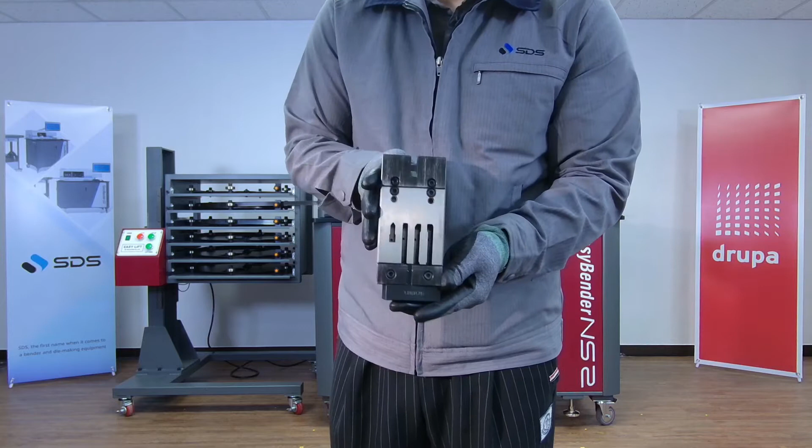And now I'm just gonna go back to the machine and show you some samples with the 23.3 millimeter rules, and then I will change over to 23.8 millimeter after changing the shims, and make some more samples with nicks, broachings, and perforations.

Now we have a setup for NS2 with Easy Lift here. This is the automatic rule stacker that we came up with maybe more than 10 years ago, and it's been one of our products for a long time. I think this is a perfect opportunity for me to introduce this one, and this is so easy to use.

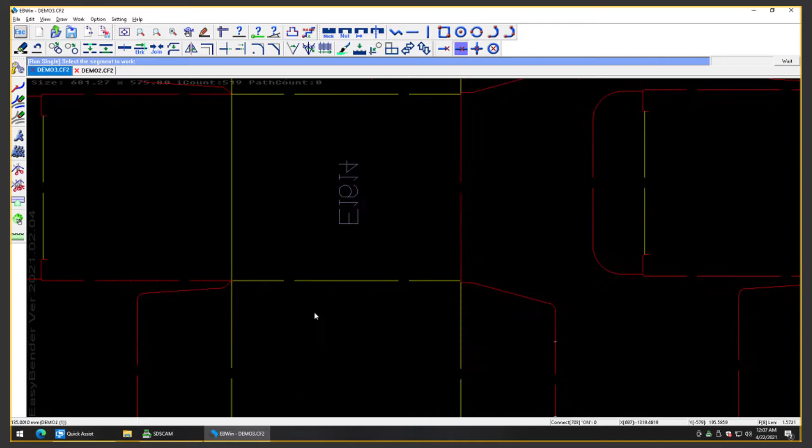And I'm just gonna change to the software here. I'm just gonna run a couple of sample pieces, maybe sample straight pieces out of 23 point rules. Okay, and run pieces with this, this is the creasing section, but I'm just gonna go ahead and run it because it doesn't really matter.

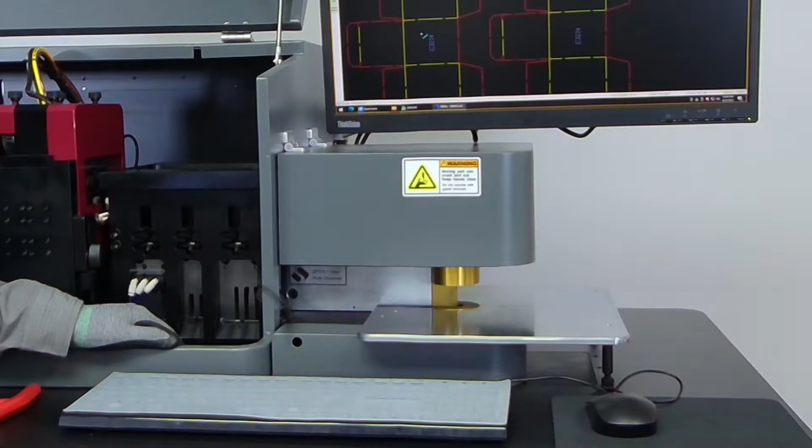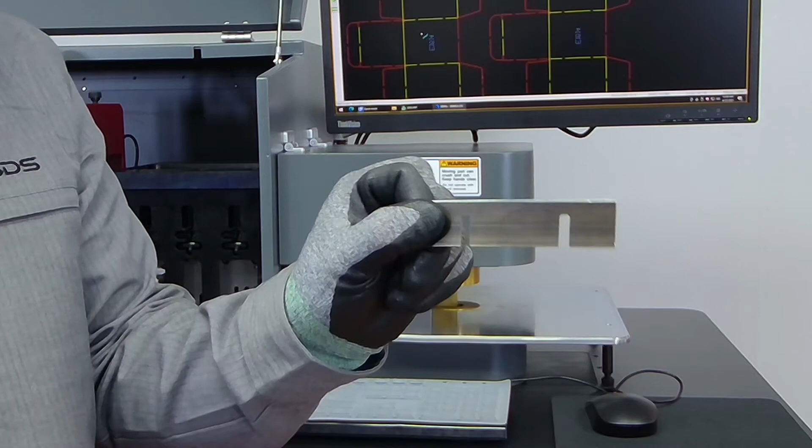So as you can see, you see the actions going on. I don't know whether you heard the sound of cutting actions, but this is the sample 23.3 millimeter rule. It says 918 23.3 here.

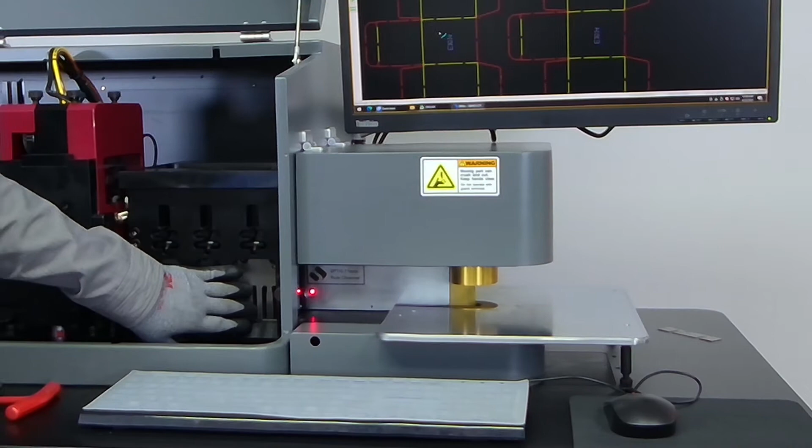This is the rule, and then what I'm gonna do now, I'm just gonna switch over the cutting shims to 23.8 millimeter shims so that I'll be able to change over to the rule that I wanted to make samples out of. So I'm just gonna take the rules out,

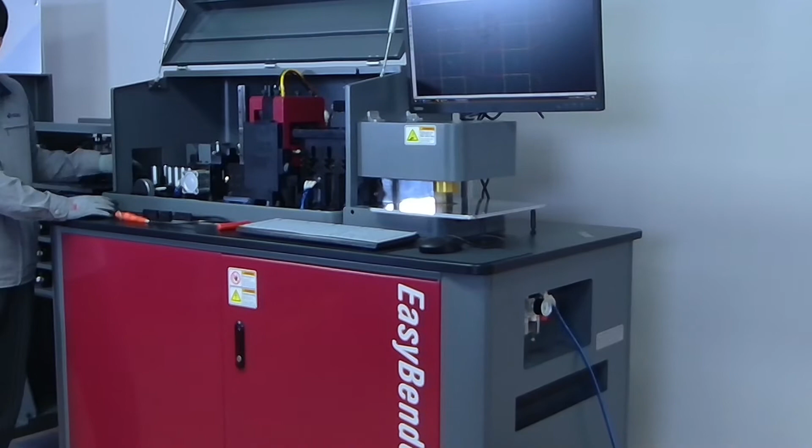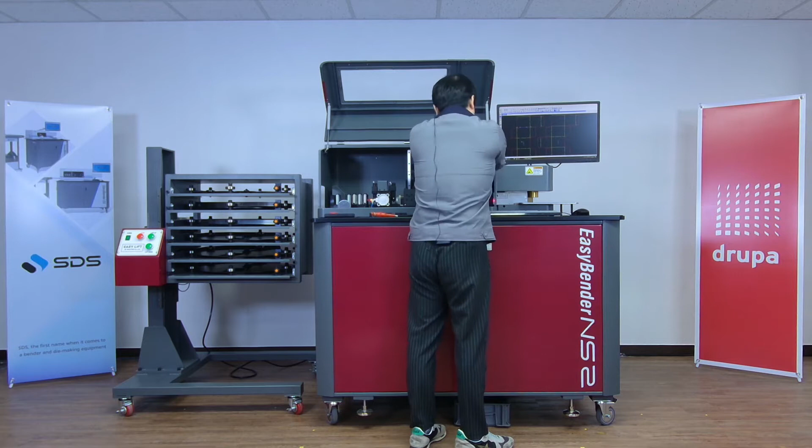and we're just gonna switch over to the main screen because I want you guys to see me changing over this one here. So changing this one, take this one out, and what I'm gonna do, I'm just gonna go back here, take the block out. This is the 23.8 tooling block, and I'm gonna take the shims out, which is

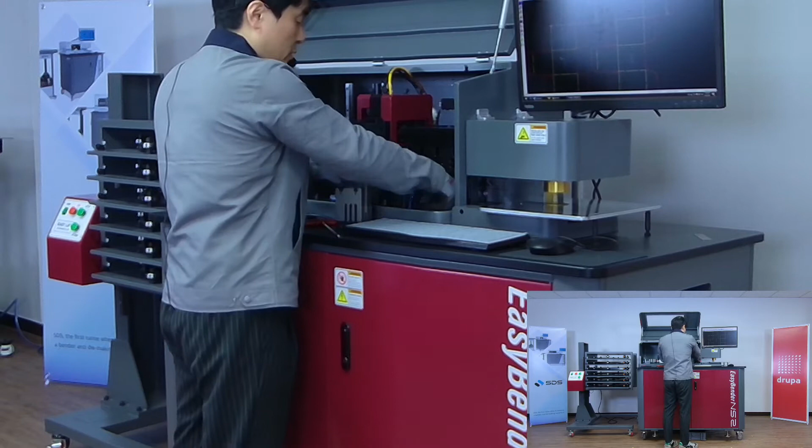23.3 millimeter shims, and I will just place here, and I will put the shims to 23.8 here, and putting this back in there. Put this back into the machine. Okay,

and then go back to the easy lift, and I will just push this button here. The easy lift will line up with the height of the feeding unit here, height of the machine, and feed this through all the way into the machine. Okay.

Yeah, just don't forget that we are doing live demonstration and something that we've never done before, so you might see some weird actions going on, but I'm actually trying to do my best here.

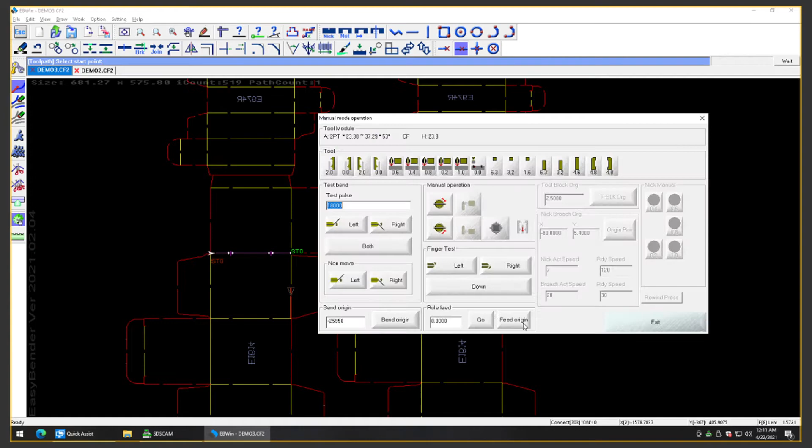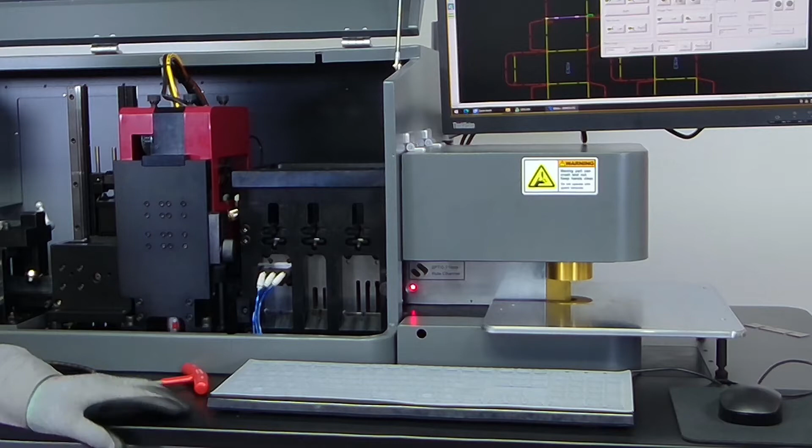So everything seems to be okay, and I'm just gonna go back to here and click home, and so the machine's actually ready for 23.8 millimeter rule to be processed. So now I'm just gonna go ahead and make some samples. But like I said, we prepared a laser die to simulate the actual job with sample pieces that I'm about to make here.

And so the last 2 days we didn't really make a lot of samples, but this time I will actually make pretty much a complete die. One section of folding carton dies out of the laser die that we have over there.

So I will show you how to use the broaching unit and how to use the nicking unit here with different nicking widths installed on this nicking unit, and then I will make some perforation rules, and then I will actually take these pieces to the die board and pound them into the die board, and see how accurate that's gonna come out.

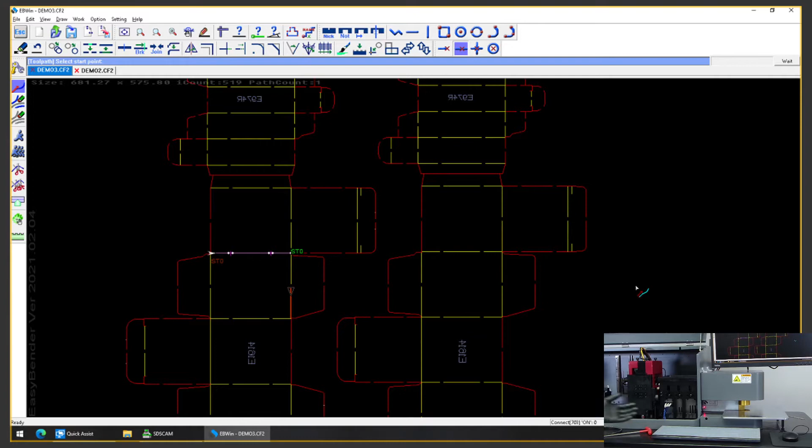So first thing I wanted to do is just make sure that the notching height on this is the, so if you come closer here, come closer, okay, all right. So this is the cutting tools here, and then this is the notching tool. And just like what I explained to you earlier, I just demonstrated the cutting tooling with the shims, but this notching tool also works with the shims underneath it.

If you wanted to use 16 millimeter die board, then you could actually put 16 millimeter shims underneath it, or 13 millimeters, or if you want to go 18 millimeters. So I think I have 16 millimeter shims underneath it. But the die board that I have is 18 millimeters, so I'm just gonna run this one sample piece,

and then I will change over to 18 millimeter shims, and I will show you the difference first, and then I will continue making those sample pieces out of this. So I'm just gonna go back there again and just run this same exact sample here. All right. So it's doing these cutting actions and notching actions here.

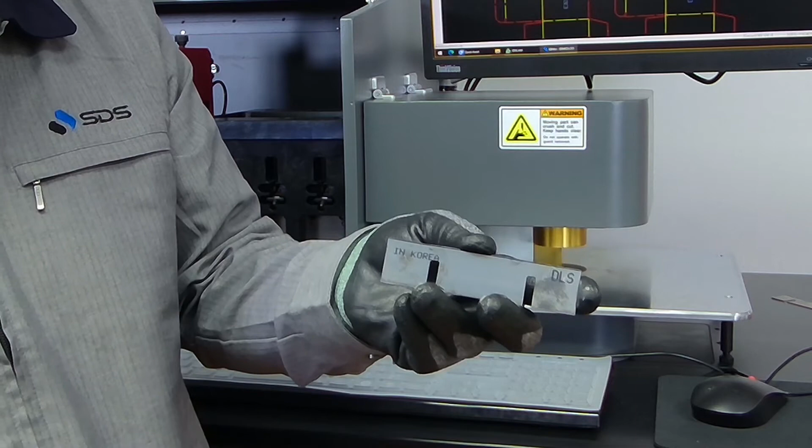So this is the 23.8 millimeter, and this is somewhere around 15.8, like 16 millimeter notching height. And what I'm gonna do, just like what I said, I'm just gonna take this notching block out. Take the rule out a little bit and take the notching block out.

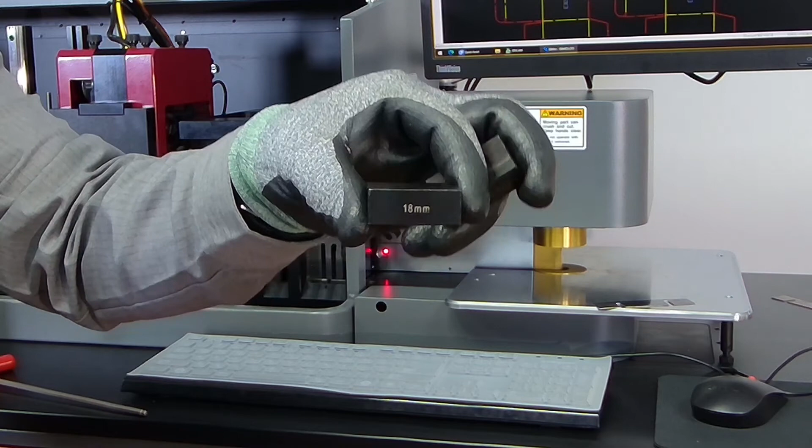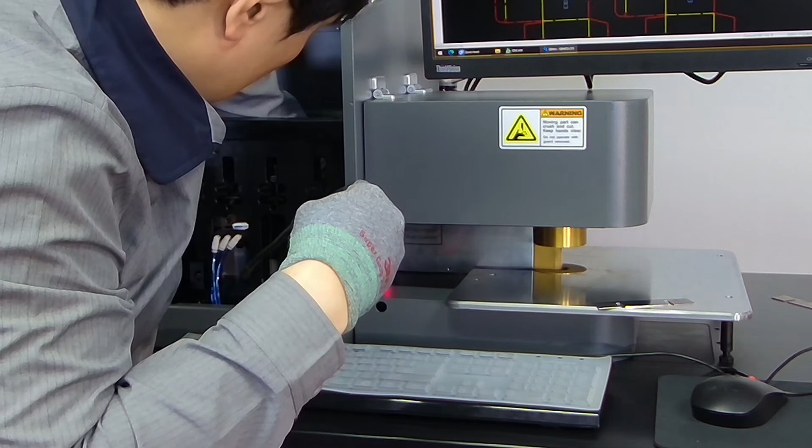This time, I'm just gonna use a magnet rule pickup here, and this is kind of the standard die board height that you're using in the U.S. market, and I'm just gonna change over from this one to this one here, and this is 18 millimeter, and I'm just gonna put this one back into the machine using the magnet pickup. Oops. Okay. All right. Then put this notching tooling block back into it.

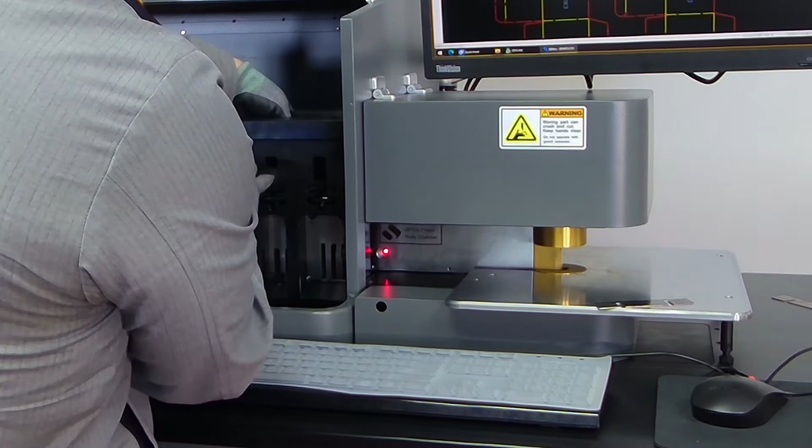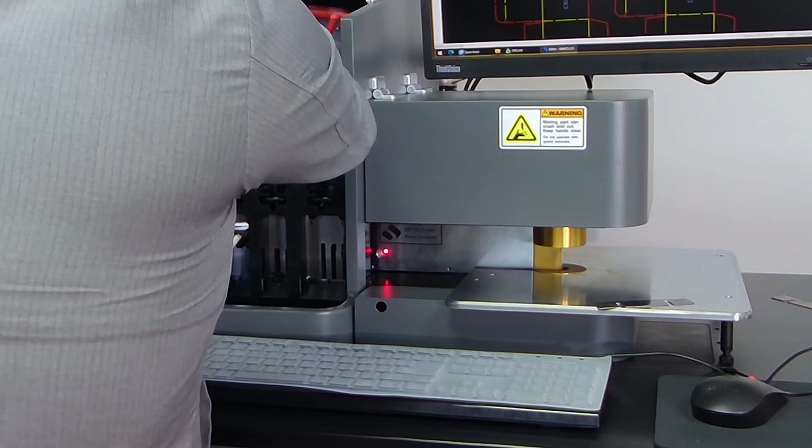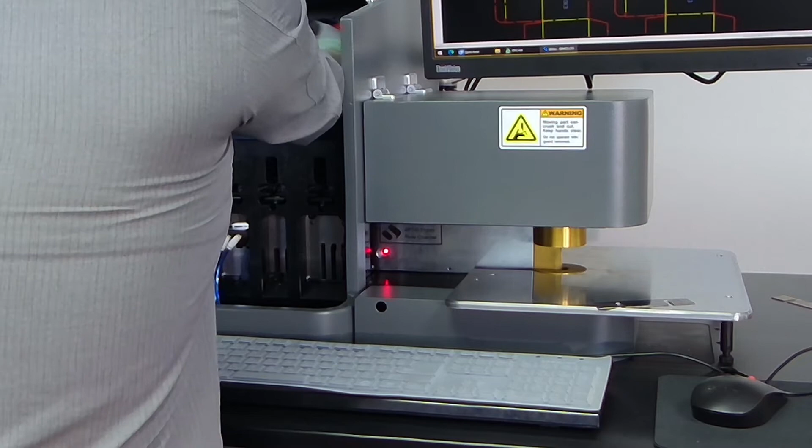Okay. I've got to tighten this screw here all the way. Then it is ready. It is ready for the 18 millimeter, about 3/4 inch high die board, and it is ready to be run. So I'm just going to put this rule back into it and click home.

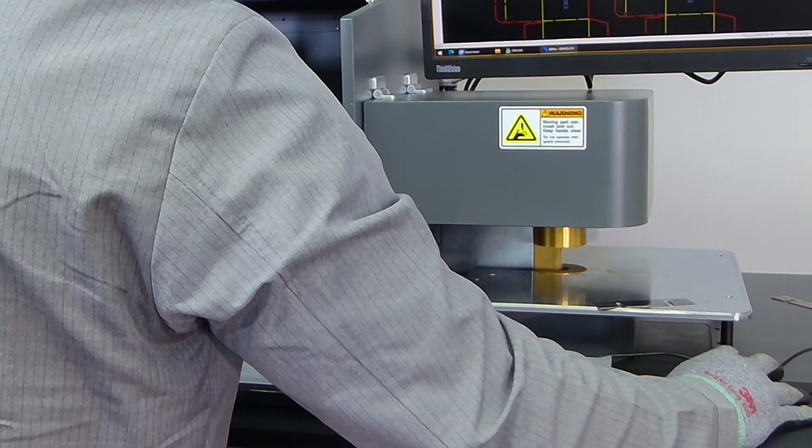Even if you don't click home, as soon as you run a piece, it'll just home it and then it'll continue to make the pieces. And so now I will actually pick. So we went to the CAD here. So I will actually pick this entire section here. I will continue to make, and then like I said, this has some nicks in it. It's got some broaching that I can put in.

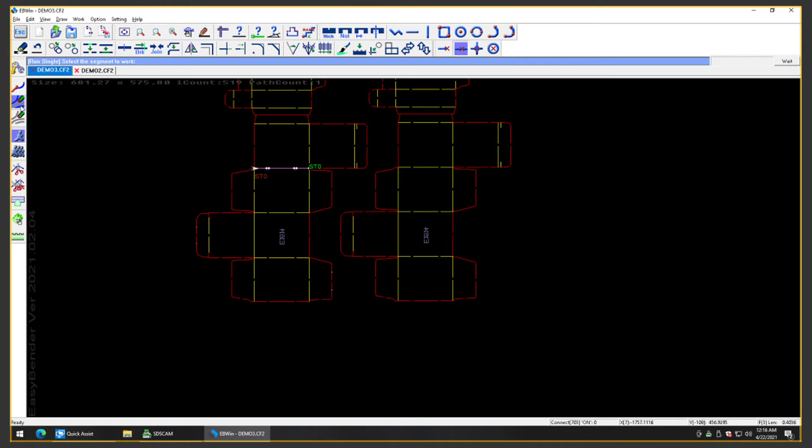Any spot, any sharper bend spot that I wanted to put it in there manually, and then I will take it from there. So I'm just going to delete the one that I just made, or okay, you know what? I think I'm going to start these pieces from here to there, and then I'm going to put a broaching function in there. One broaching at the sharp corner bends here.

All right, and here. So with this piece that I just programmed, I just wanted to highlight a couple things here. And like I said, you could actually put a broaching on any sharp corners somewhere around here or here that you wanted by clicking auto V-cut. It'll automatically find the sharp ends and put the broaching in there.

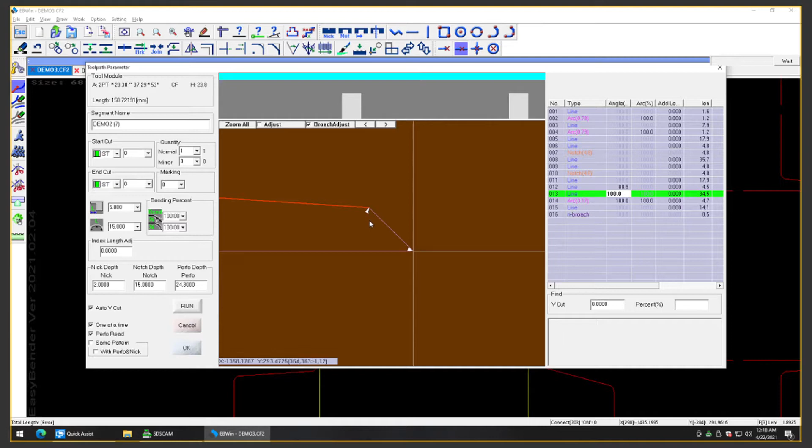And since this broaching unit has sharper bend broaching for the sharper bends, or flat broaching for the flat bends, you could actually change that by clicking the icon with a left mouse click. You could actually change it from sharper to the flat broachings, just like that. Or if you click one more time, it'll go away. And I'm just going to leave this sharper broaching here, and then I will continue to make pieces.

But another function that I wanted to point out with this window is this same pattern detection function. As soon as you click this, take a look at this quantity normal mirror section right there. It'll actually detect all the same pieces and mirrored images in this CAD file automatically, so that you don't really have to count the number of pieces when you are programming this. So this is a great feature. I'm sure it'll save you a lot of time.

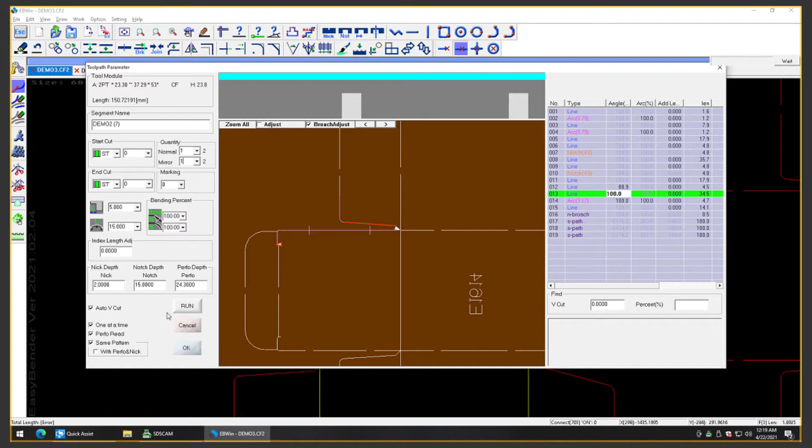And so I'm just going to go ahead and run these pieces, but this time I'm just going to run one piece at a time, because we've got multiple ops here, so we don't really need to make two of them on this one. So I'm just going to go ahead and run it now. All right, so this is the broaching, and it's actually going up and down, and now it's doing the notching actions, cutting actions.

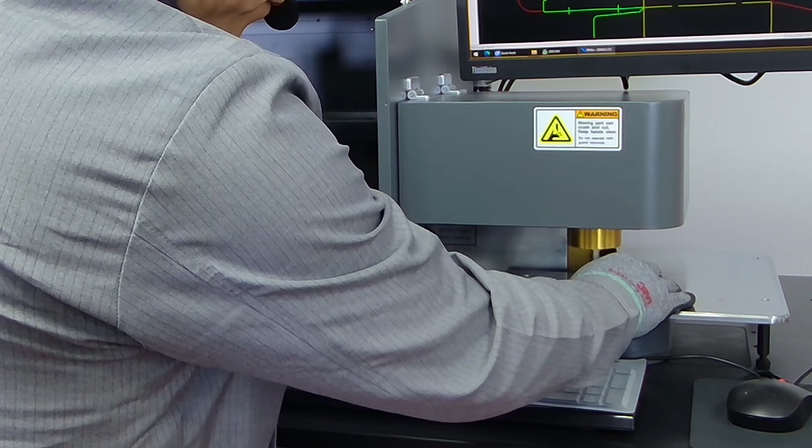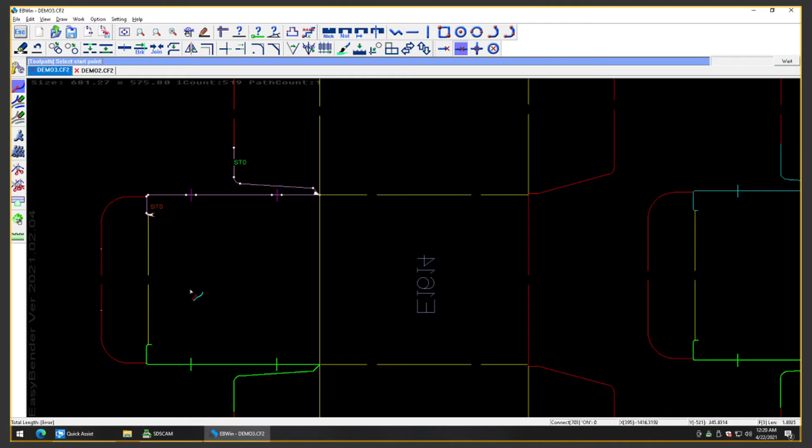All right, we just made the first piece that I just plotted here, and you can't really see the broaching mark because it's right here. So I can easily squeeze it in before I actually pound it into the die board. Alright, this is the mirrored image of the pieces. So like what I said, we're just going to go to the die board, and I'm going to put this in the die board. So here, I think I'm going to use this section here.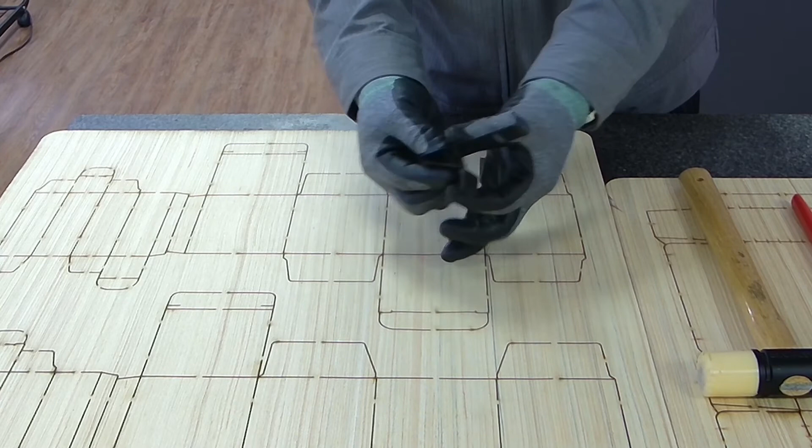I'm just planning on making entire dies here, so I'm just going to go ahead and squeeze it, because you can't really squeeze this piece with your hand if you don't have the broaching here. But now I'm able to do it here so easily. And then I'm just going to put that in. Oops. Let's see, pardon me. Yeah, this. Okay, and then another piece here. Squeeze it in again.

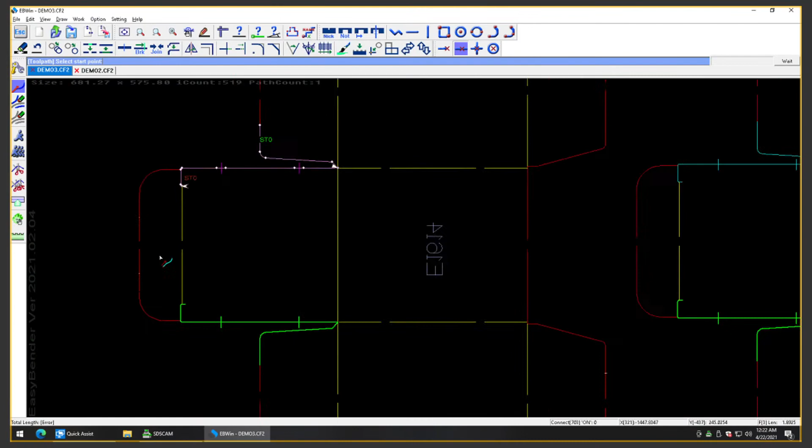All right. So it seems to be perfectly lined up, and I'm going to make another one of these pieces with the nick, and I will just continue plotting this all the way around and finish this die. And so we're just going to go back to the machine again. All right. So you could actually change that to the CAD file, and just like what I said, I'm going to go ahead and plot this piece. I've got two nicks here, and this is a 0.4 millimeter nick.

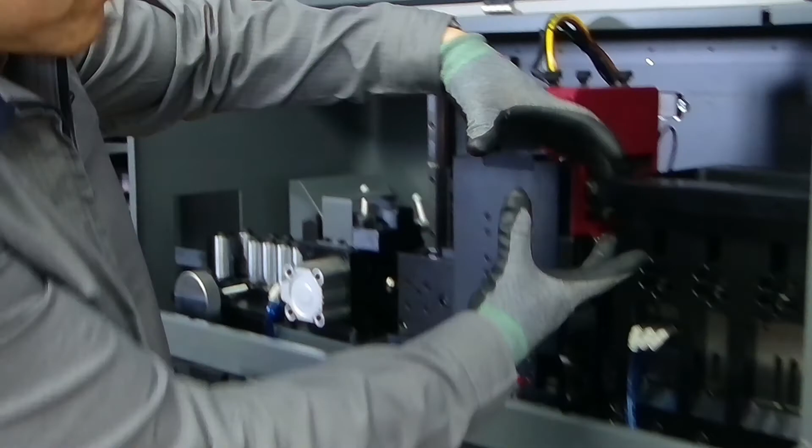And if you come closer, it's got five. This is a carousel that has five different nicking blades in here, and it actually automatically rotates depending on the nick size that you want, and it'll nick it for whatever size of nick that you want it to run.

So this time we have a 0.4 millimeter nick, and just like what I said before, it already detected the same pattern here again. I'm just going to run one this time, so just turn the same pattern detection function off, and just go ahead and run it.

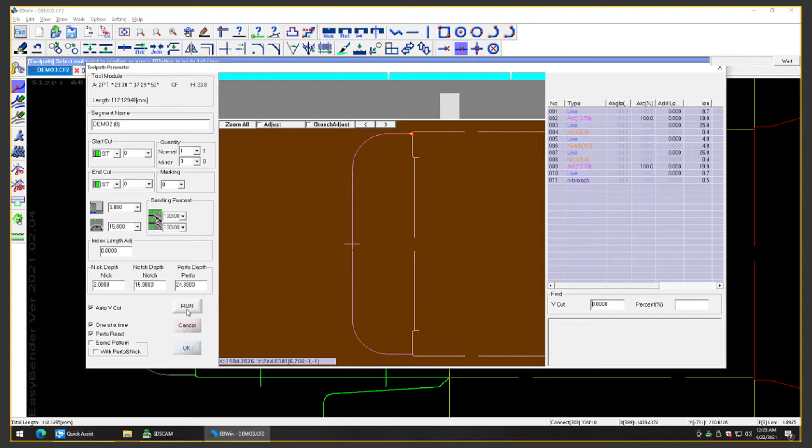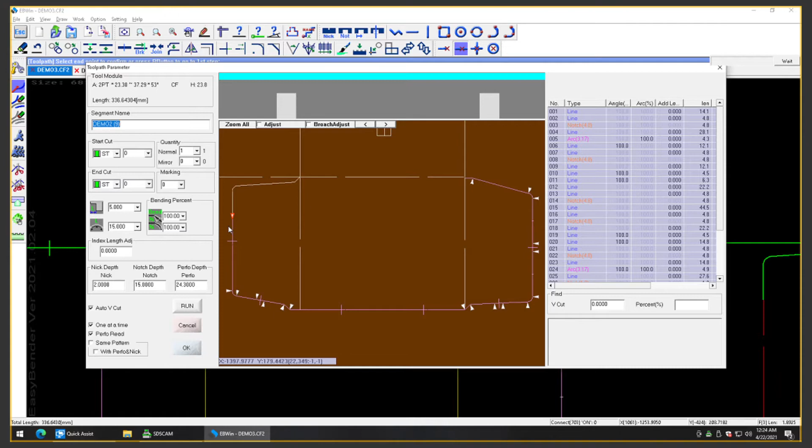All right, so it keeps bending the pieces here. And now I will continue to make these pieces while the machines are actually bending here. Another piece that I'm gonna make is this piece right there, all the way around, straight to straight, and I'm just gonna add a little bit of length to reach all the way up to the die board, and I'm gonna go ahead and run it.

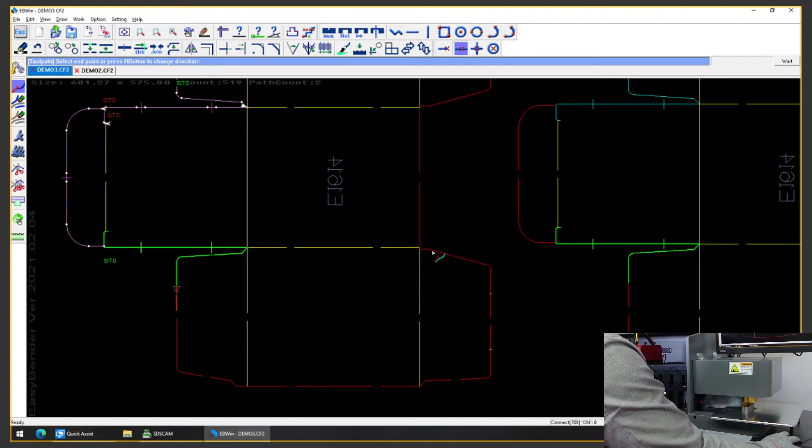Okay, I'm gonna go ahead and do this again, because I did not realize that the broaching function is automatically turned on. I'm just gonna turn this off, and then, it's okay, that's fine. So okay, and this is another piece. Let me make sure that I'm doing this right, and gonna go ahead and run it now.

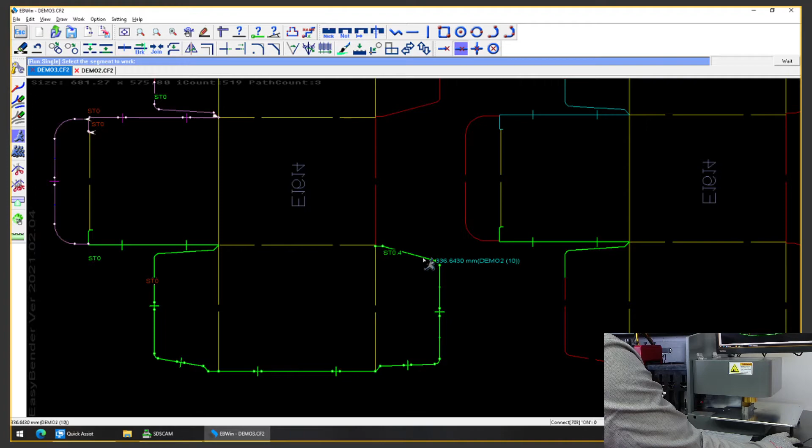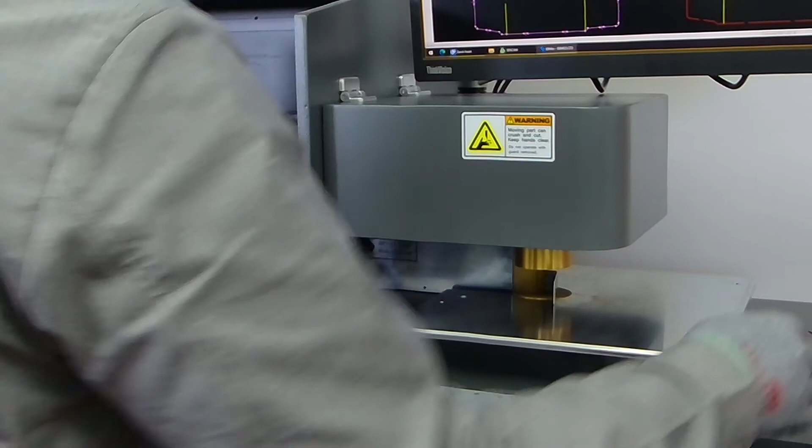Then while the machine is actually running, okay, it's just finding the home position here. So the machine's actually doing some nicking actions here. Okay, this I'm just gonna put it over there. Just gonna change that to miter. And run another one of these.

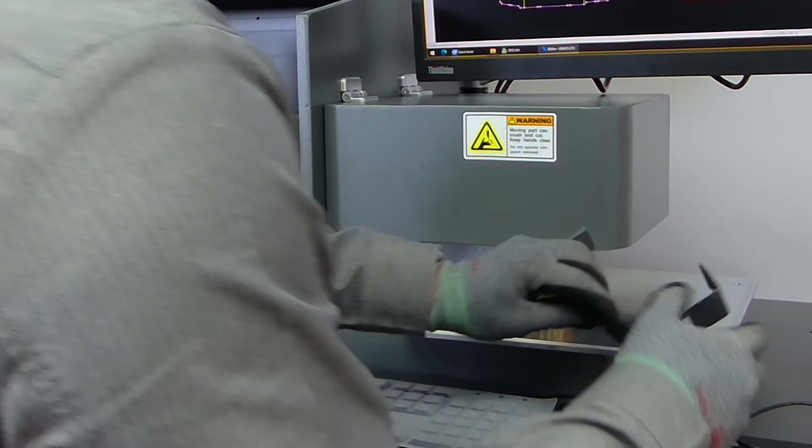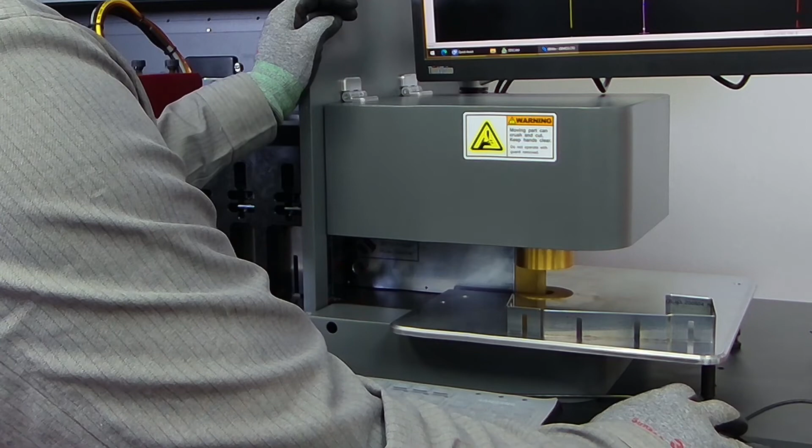Okay, so on this file, I actually added a 1mm nicking wheel here. And as you can see, this is a wider nicking wheel that we actually have on this file. So I'm just gonna put this one in here. And I will continue to plot it with this straight piece here. Make sure I'm plotting it from all the way to the other side. And this one, I'm just gonna go with miter, and 0. And go ahead and run it here.

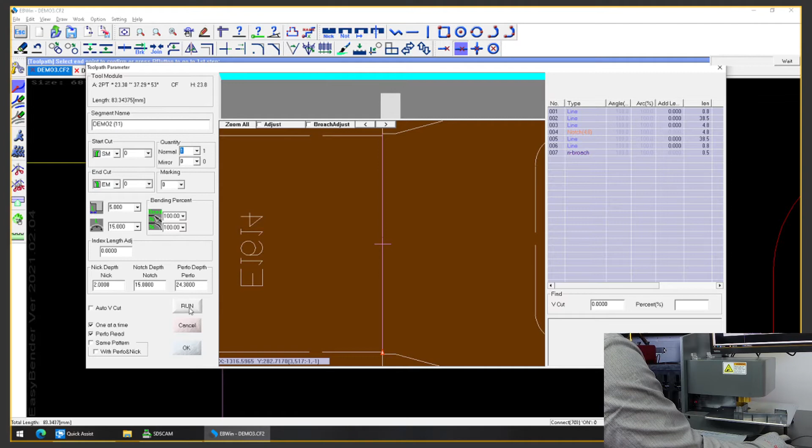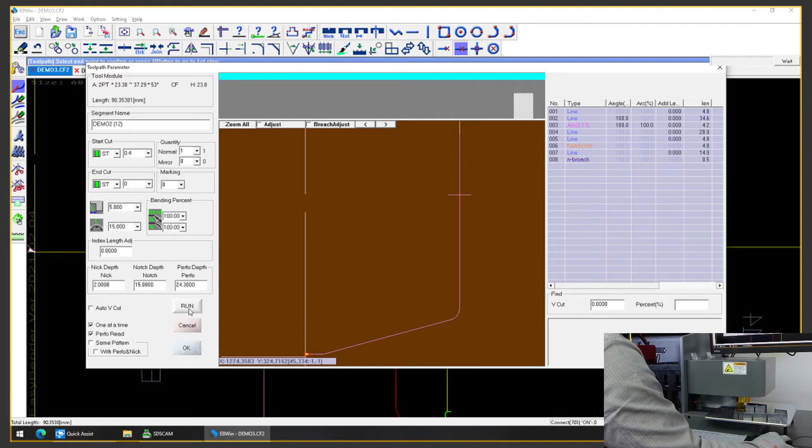And another piece from here to here. And this one should be straight to straight. And I think I'm gonna add slight length at the end here. And run it. So we have so many pieces here. I'm just gonna stop it here for now. And we're gonna move to the die board. And I'm just gonna put that in there. Alright, these 4 pieces here.

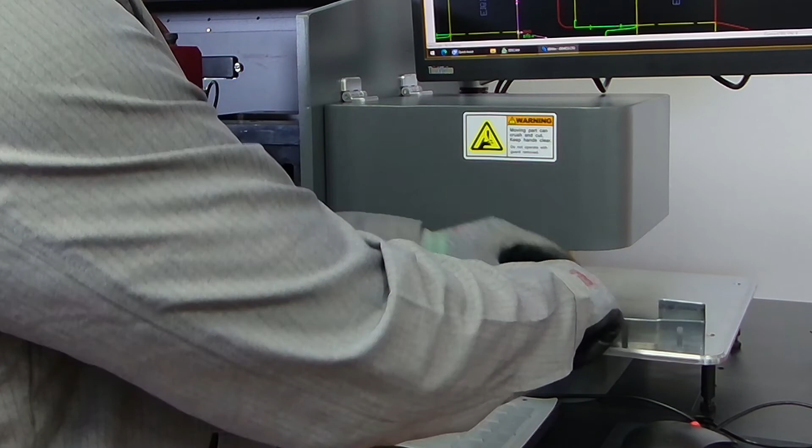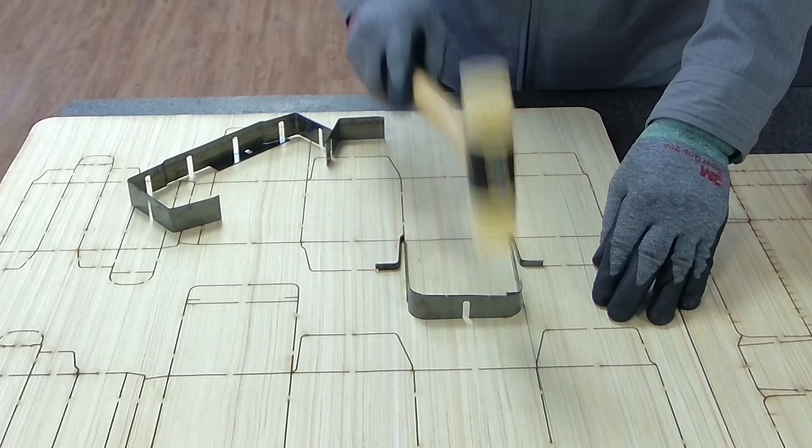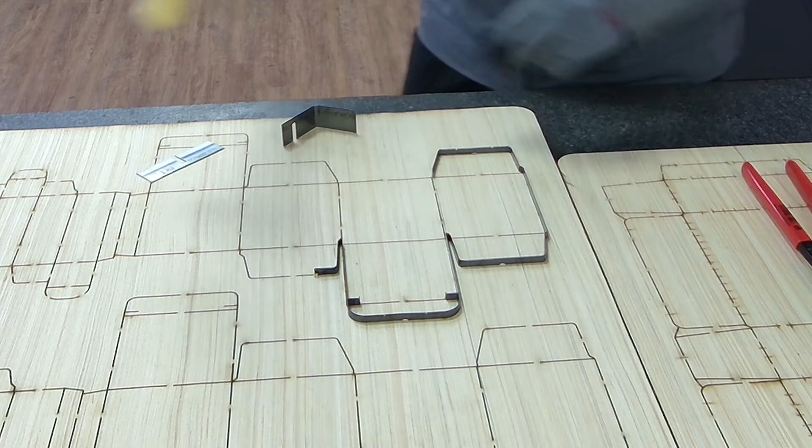So the first one would be this piece with 0.4mm nick here. Miter piece. And then I'm just gonna put this one first. Make sure it lined up. Okay. And then I'm gonna put this piece here first. And then the miter piece in between. And so yeah, as you can see, it lines up and it fits perfectly here. Alright, and so I will continue to make all these pieces around, and let's do the machine again.

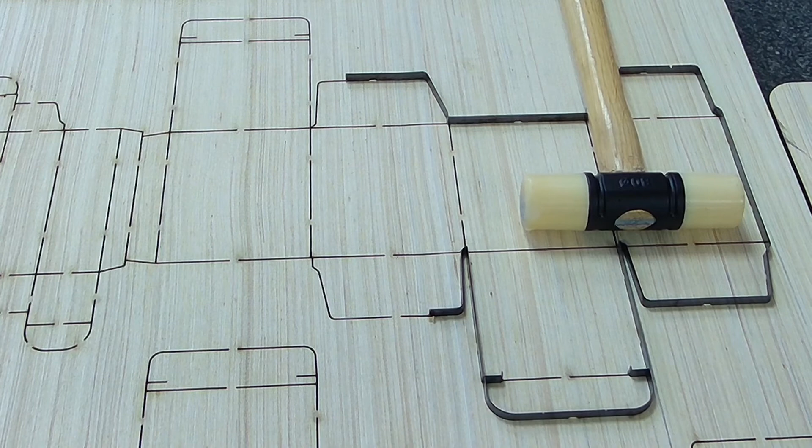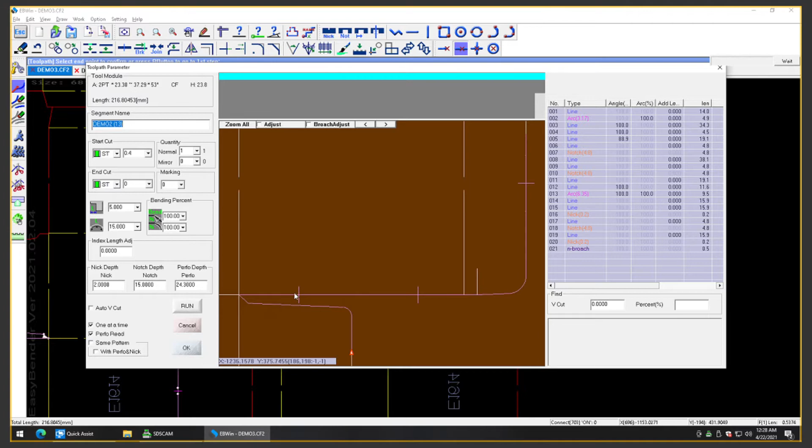Alright, so change it back to software, and I will continue to plot it. Plot this piece here, starting here. I think I'm gonna end it here. And this one here has got 2 nicks, and I'm gonna add one more broach after clicking manual broaching here. And then it's gonna be straight. I don't need to add any length. And then you could actually hit the run button here. It'll immediately run the one quantity displayed on this section right there. So I'm just gonna go ahead and run it.

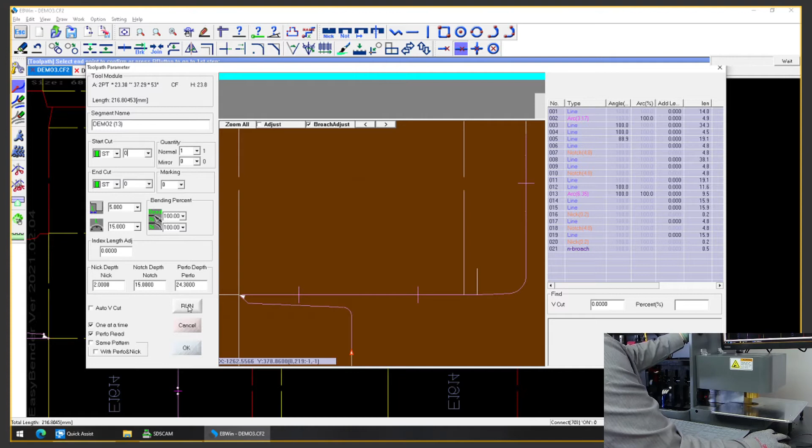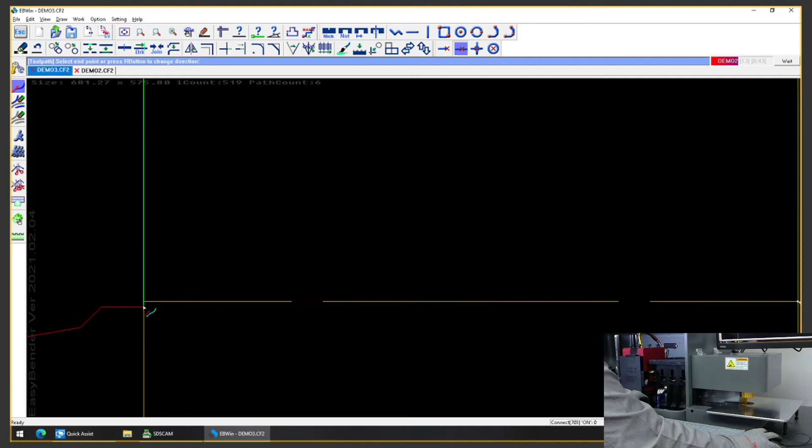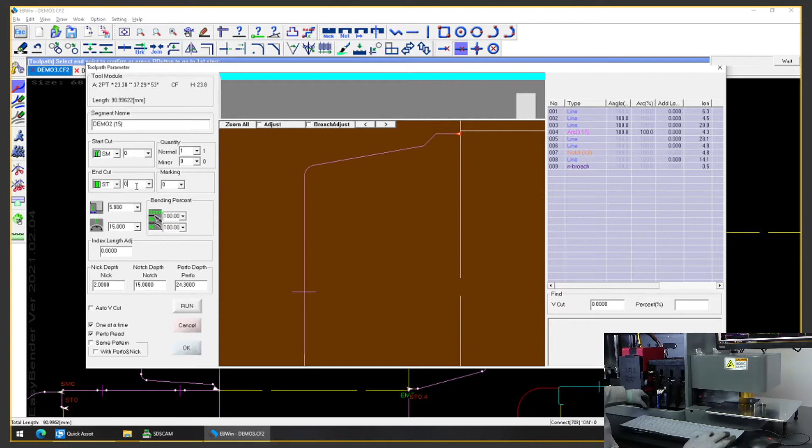So like I said, it'll nick it, it'll broach it, and then it'll notch it, it'll cut it, and it'll do all those things. And then I'm just gonna go back here. And I'm gonna plot it from here all the way to right here. Okay, so it's gonna be straight to straight. I'm gonna add a little bit of length here. And then this is the last piece. From here to there, miter to straight. Alright, so I'm gonna run this, and I'm gonna run this.

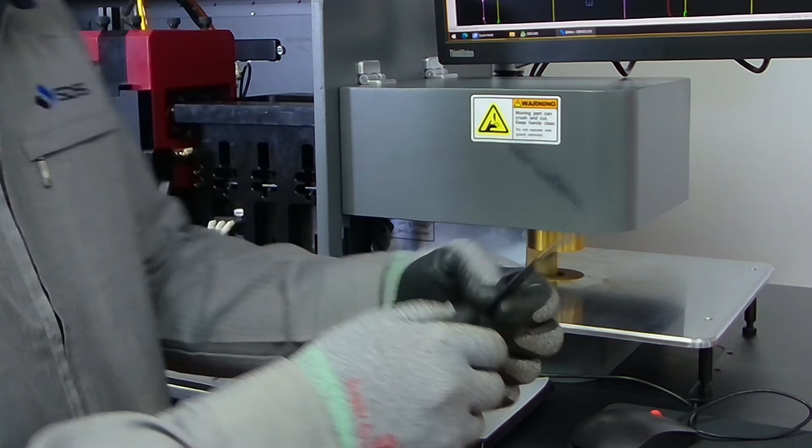So this is another piece with the broaching again, and I'm just gonna wait until it finishes it. All right, and this is another long piece here, and then this will be the last piece. So this is the longer pieces, but the previous piece with the broaching has got 0.2 millimeter nicks in here. So on that die board, I actually ran 0.2, 0.4, and 1 millimeter nicks. And so this is fully automatic.

We're gonna move to the die board, and I'm gonna pound it back into the die board, and just like before with broaching, I can actually squeeze it in easily and drive it in. Okay. It's a perfect seam here and perfect butt joint right there. And then the long piece here, just gonna line up. Every radius and sharp bending angle out of EasyBender just comes out perfectly here. So all you have to do is just line it up with the die board and pound it into the die board.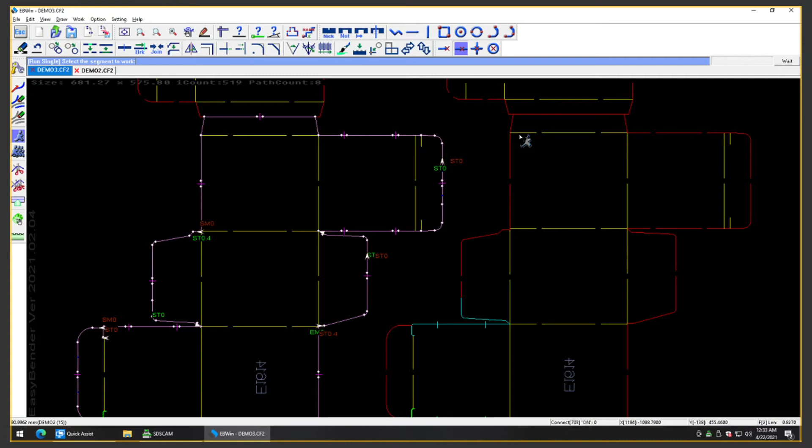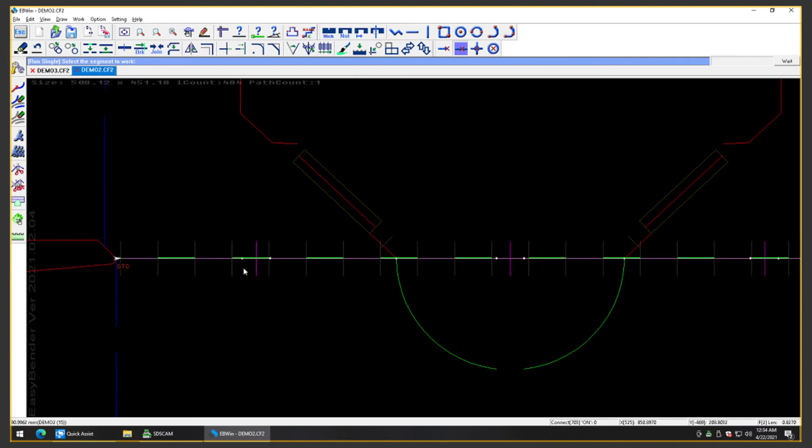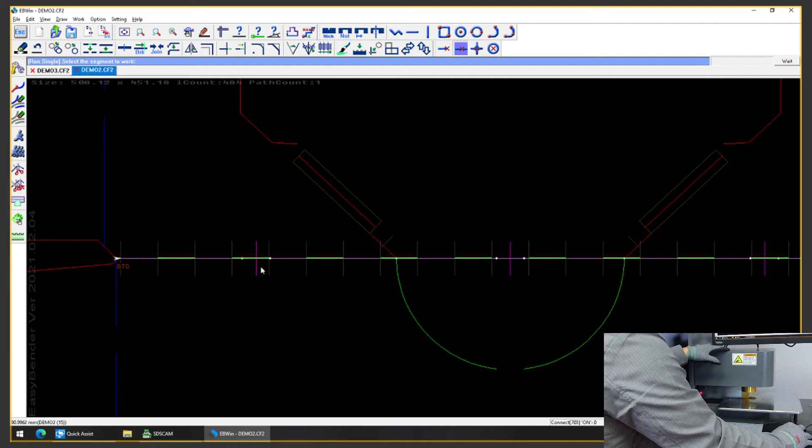As of now you could actually make perforation with pre-configured cross lines added by Impact or Simpack here. So these cross lines, as you can see here, indicate the cut and crease width of pieces. So if the line from here to there is 3 millimeters, then you're gonna have 3 millimeters of cut and crease rules. If the cross lines are like 6.35, which is quarter inch in US, then what you're gonna get is 6 millimeters of cut and 6 millimeters of crease and so on.

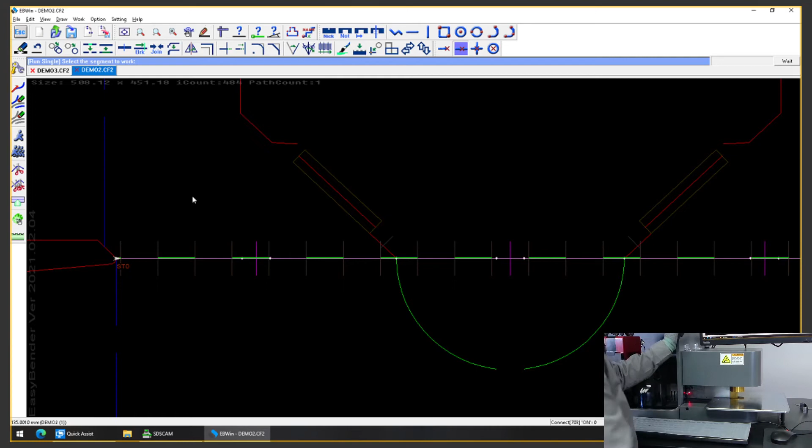So this can be pre-configured with your CAD file, and all we need to do in our software, we could actually match that pre-configured setting with our software. So every time you open up files like that, it already detects whatever distance you already pre-programmed. And this is one of the new added functions of the software.

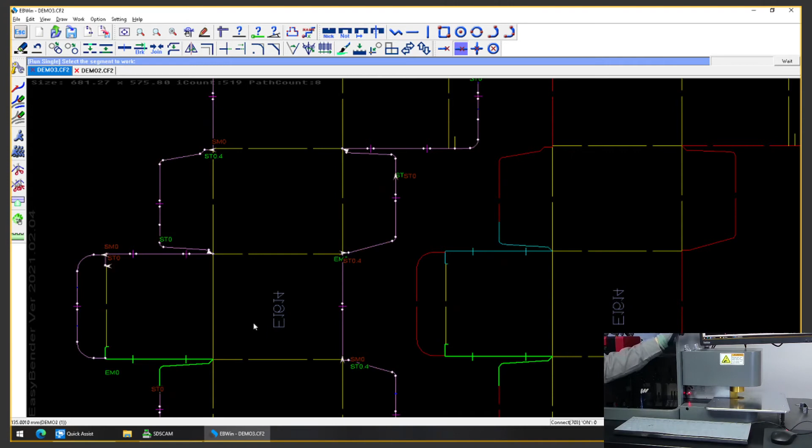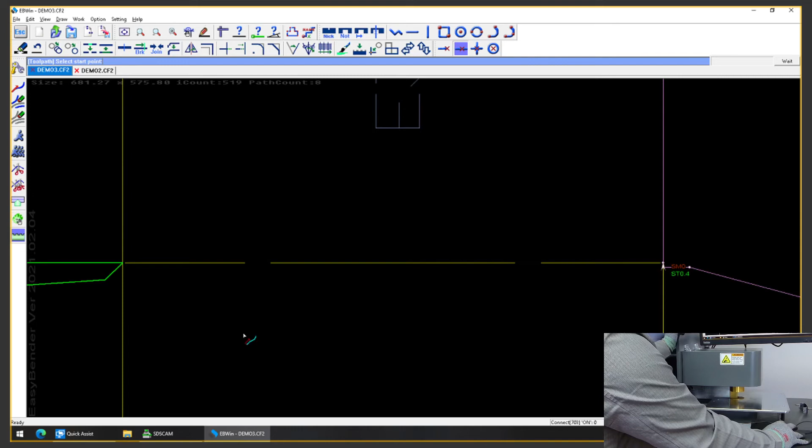So I'm just gonna go ahead and finish the die by making one of those. And here, as you can see, we don't have any pre-programmed line. I'm about to make one out of this line here, but even if you don't have a pre-configured line, you could actually create one with the built-in software function that we added. So all you have to do is click this draw tool item here, and you just click start and end, just like when you create a toolpath to create the actual jobs.

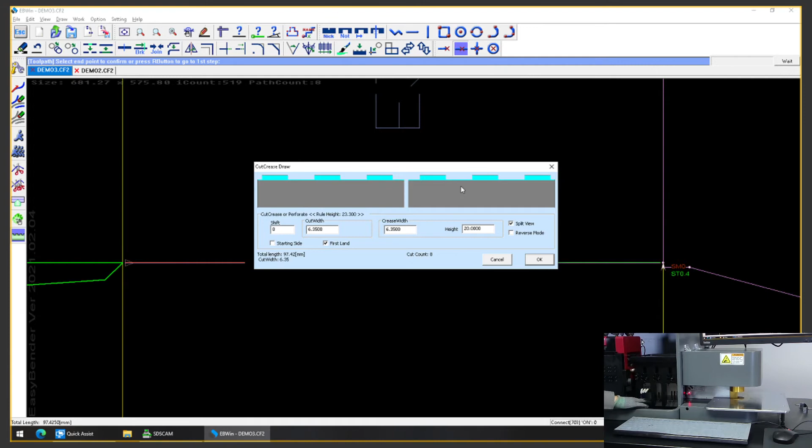And you could actually type in the width of cut and width of crease by typing numbers in here. So this time I'm just gonna go with quarter inch, which is 6.35. Hit enter, and then crease I'm just gonna go with 6.35 again, and then the height of the crease will be defined by the shim that goes underneath the tooling block. So this is all you need to do, and then you just go ahead and hit OK.

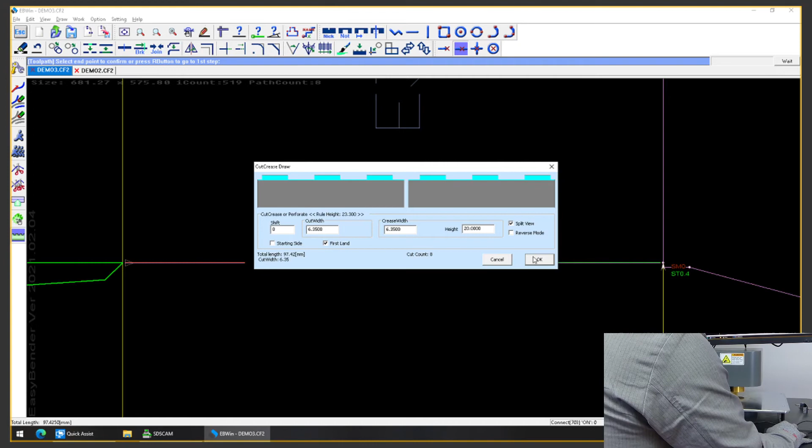This is a user-friendly graphical drawing that will actually show you what it looks like at the end. So you could actually see the actual cut-crease or perforation drawings out of here. And then what you need to do is just hit OK, go back to the toolpath and finish up creating the toolpath. And as you can see, you will see the entire settings again. I'm just gonna go with straight to straight, and then it is ready to be run. So I'm just gonna go ahead and run one.

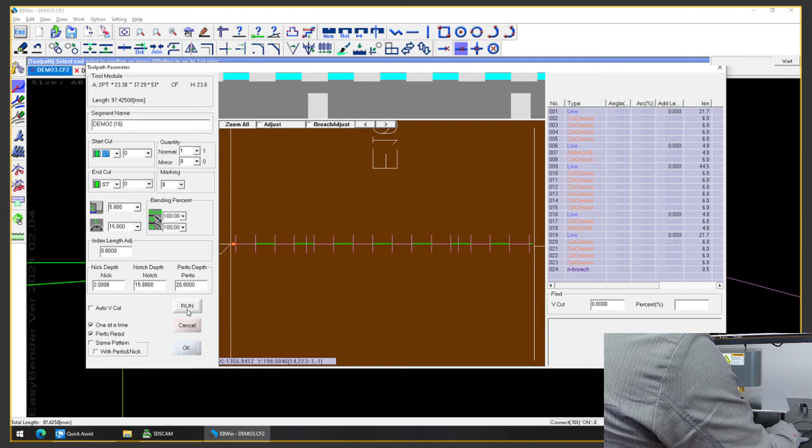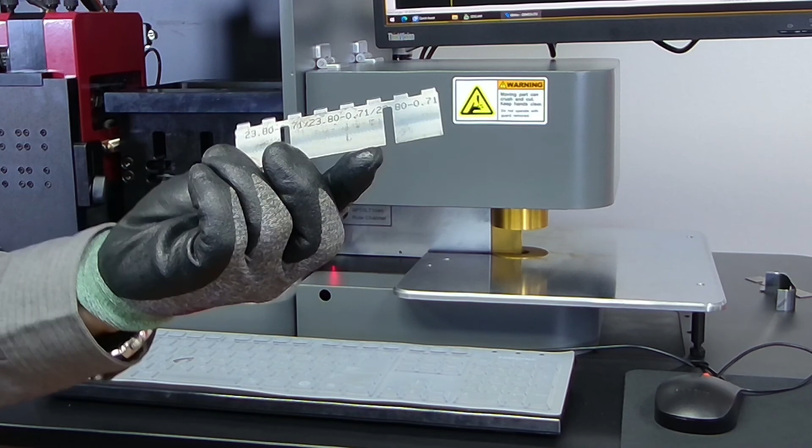Perforation actions, notching actions. So this is the one perforation rule that we got out of the current configuration of shims that go underneath it. And what I wanted to show you, I'm just gonna go ahead and switch over the shims with a different shim height, and I will basically have a higher creasing part of this rule.

So what I'm gonna do now, I'm just gonna go ahead and take the block out. Obviously I need to take the rule out first slightly and take the block out. And take this perforation tooling block out. And I'm gonna use a magnet pickup and take this shim out. As you can see, this is slightly thinner than the other one, and you could actually define any size of perforation shims. You could make your own shims, or you could supply any size of shims that you want, and then put it back underneath the block.

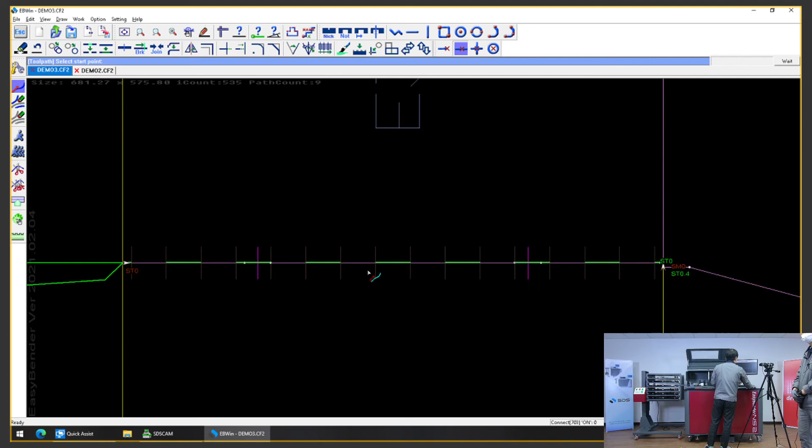Put the tooling block back in, and tighten these screws. And then put this rule back in, and it is ready. So I'm just gonna go ahead and run another sample piece, and here it goes. Okay. Okay, so this is it. This is the one that I just got, and this is the one that I had before with different shims.

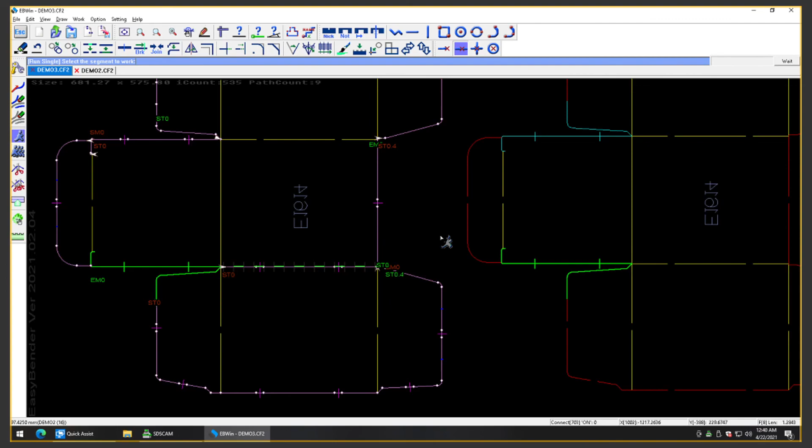Okay, so I'm just gonna drive this one into the die board and finish up this session. Let's go back to the die board. Go ahead, move. Yeah. All right. So we got these two pieces here. I'm just gonna put one in here and another one in here. All right, so this is it. All right.

This is all for this session today for NS2. And thank you for attending our live stream for EasyBender NS2. We tried it a slightly different way today by actually completing a complete die.